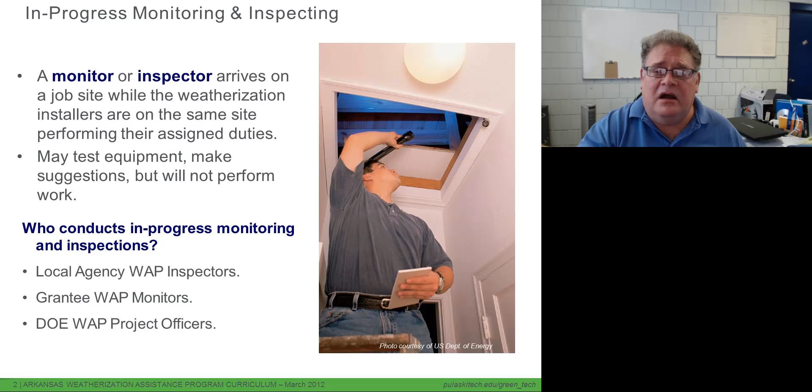But the point is you're going to have a set of rules, some procedures to follow, some regulations, some funding limitations, and we're using the WAP as an example. So within that example, our local agencies would have their own QCIs that are going to go out and do this, and then the people they get their money from is the state or the tribal organization. They would then in turn get their money from the feds, in other words, the Department of Energy. So the DOE project officers, the state or tribal monitors, and then your QCI, your local agency, are all three very good candidates for going out and doing this kind of inspection.

So the reasons that we do this are, this is a good chance to discuss the scope of work. If we have something that is on the scope of work that's not really well understood, or that's not necessary to do in a particular way, we can do it in a much less expensive way and still meet the requirements of the audit, then this is a good opportunity to discuss that and to finalize what the work scope really should be as opposed to what it is now.

The other thing is it allows us to test and make sure that the equipment that the crews are using is effective and working properly. It also allows us to ensure that the procedures and the policies of the program are being followed.

If we have a policy that there's no cussing, no foul language, that we're going to observe a very sexually neutral work site where we're gender inspecific and this kind of thing, then those types of things should happen out in the field. It shouldn't just be that all of that quits when the crew gets in the truck and the horseplay starts and the non-professionalism starts.

A certain amount of camaraderie is necessary for a crew to function properly, but this doesn't necessarily need to be part of it. The respect that they have for each other should also lend itself back to the agency, and part of that is to enforce the rules and policies that the agency has for their conduct.

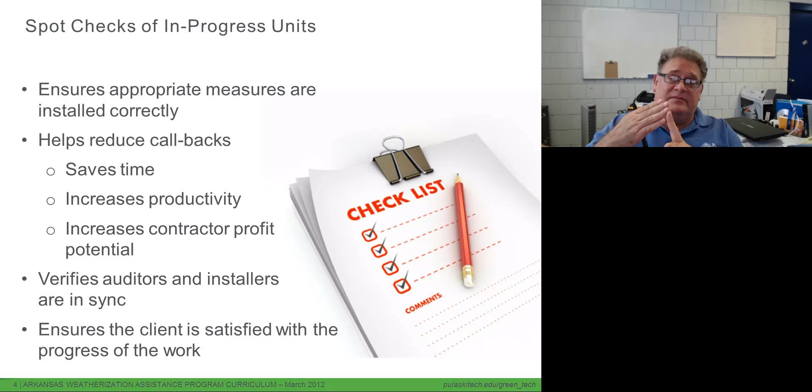Now we can get the auditors and the installers on the same page and say, hey guys, this is what's really going on. When we say do this much and no more, we really mean this much and no more. This part of it's not necessary, it wasn't authorized, and we're spending money here that we don't have to, and it's slowing us down, so let's not do that anymore.

The other thing is it allows the quality control inspector to interview the client, find out how comfortable they are with the work so far and with the crews. Sometimes we get on somebody's property and we know that we're making them uncomfortable just by being there. But we may be making them uncomfortable additionally and unnecessarily with the way that we're acting or not acting.

We may be being way too formal with them and putting them ill at ease. We may be not being formal enough. They're not hearing enough yes sir, yes ma'am from us, and they feel like we're disrespecting them.

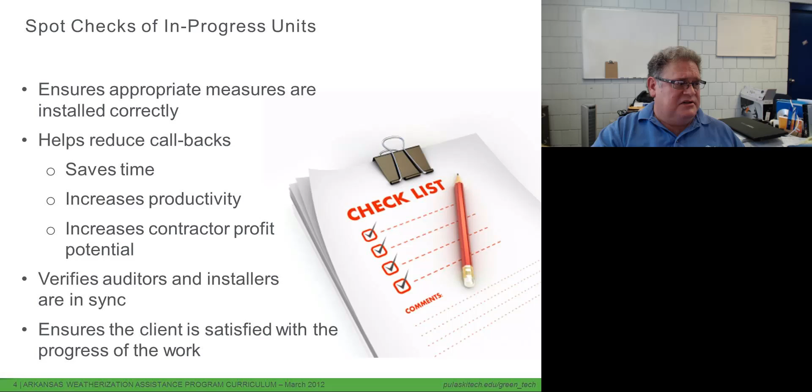So sometimes having the QCI talk to the client, find out what the ins and outs of what makes them happy or what the crew is doing that they find pleasing, and bolstering that up helps to ensure client satisfaction and their happiness with the work. A lot of times just being happy with the crew means that they're going to be happy with the work.

Again, let's talk about finalizing the work scope. This is a good opportunity to talk about and make sure that the scope of work really identifies what we need to do.

Sometimes we'll have a difficult situation. The auditor may have called for a lot of material and a lot of repairs in order to dense pack a wall that can't be done from the outside because of the siding material or access, so it has to be done from the inside. However, once the crew chief looked at it, he realized we've got a 12 and 12 or a 12 and 16 pitch roof. We've got plenty of room at the eaves to either drill the top plates and dense pack these walls, or guess what, they're balloon framed. We don't even need to drill. We can dense pack these no problem.

Which means that we don't have to go in and mess up the interior of a home. We can save a lot of money by doing all this work from the attic as opposed to going inside.

The other part of all this is that it helps to identify opportunities that the auditor may have missed. Auditors go in, and while they have their routine and their checklist, they're trying to catch everything in one look, just about. They've got 2 to 4 hours to take a look at a house and come up with the best plan that they can. Sometimes things change from the time that they audit the house to the time we get out there to weatherize it. There may be an exterior door that the auditor completely missed because it was covered by shrubbery or inaccessible, or had rubble piled up against it, or furniture from the inside. They just didn't see it as an exterior door. It didn't register with them, so that may be an opportunity to do something.

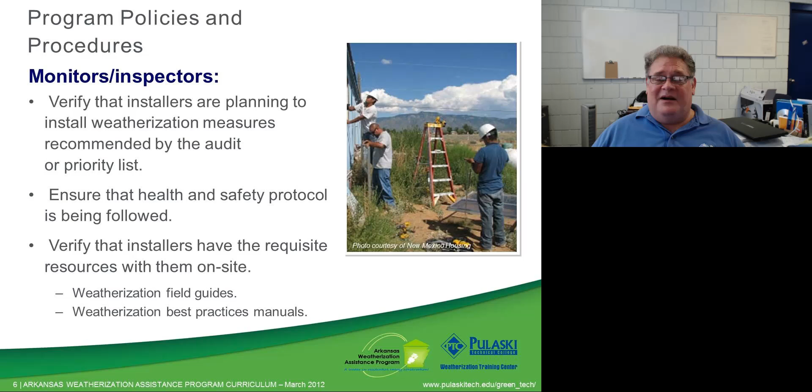And then also verify that the installers have the right stuff with them. Do they have the right door? Do they have enough material? Did they bring enough sheetrock? Do they have enough caulk? Do they have field guides? Do they have a list of best practices? Do they even know what the priority list is? Did they bring the work order with them? You'd be surprised at what kind of silliness happens in the heat of the morning trying to get out the door, get a cup of coffee, get the truck loaded, and get to a job. Sometimes you just have a bad morning and wind up on the job not nearly as prepared as you'd like to be, and sometimes you need to get reminded of it so that you quit having those bad days.

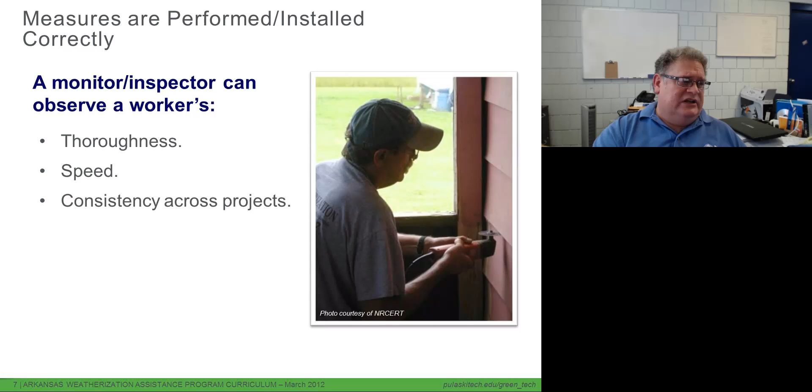The other thing is to take a look at whether or not those measures are performed and installed correctly. Not only are you doing what's on the audit, but are you doing it properly? And here is a really grand chance for a monitor or an inspector to check and see how thorough a contractor or a crew is, how quickly they can move through the work realistically - not just set a speed record, but realistically, day in and day out, how quickly they can move through the work, and then also how consistent they are across all of the projects they may be working on. They may be really good at something and really bad at something else.

And then I guess this is probably my favorite part. Nobody knows how to do anything until they're trained or they teach themselves. And a lot of times we assume that what is common sense is known by everybody.

Let's face it, common sense is only common when everybody's in on the joke. If you don't understand, you just don't understand, and there's nothing wrong with not understanding. It just means nobody's explained it to you.

And that means you haven't been taught what the meaning of it is. So if we don't train our crews and refresh that training, then we cannot expect them to perform.

So this is a good chance for a quality control inspector or a monitor, especially a monitor, to identify what kinds of quality control issues are taking place in the field, what kind of problems we're having. If they're seeing an agency-wide or territory-wide inconsistency, they can go back and say, okay, we need training on how to do this or that.

This might apply to all the installers, or maybe it's an auditor issue, or even a QCI issue. The other thing they can do is recommend that the agency adopt this as a best practice, the currently agreed-upon best way to do things.

Maybe they're just a little reluctant to do it because they haven't seen it done. Maybe all they need to do is go visit another agency for half a day and watch them do it, and everybody who was reluctant goes, oh yeah, that's nothing, we can do that, we need to be doing that.

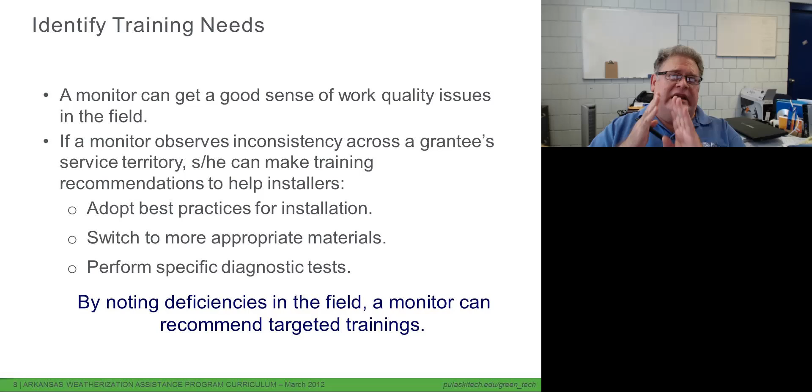By noticing what's going on, both right and wrong, a good monitor can recommend very targeted trainings to correct just the issues they're seeing, just the issues.

Equipment testing: monitors and inspectors may also test equipment while on site, although it's not required. They may look at equipment like the insulation blowing machine. Are the pressures set properly for dense packing? Do we have leaks in the hoses? Are the hoses ready to explode from old age and duct tape?

What about blockage points? Are we restricting and jumping down in size too fast? It's considered much better practice to make gradual reductions in hose size rather than dramatic reductions, because that helps prevent blockage.

And then combustion safety equipment: are the combustion analyzers calibrated properly? Do they have fresh sensors, or are the sensors two years overdue for replacement?

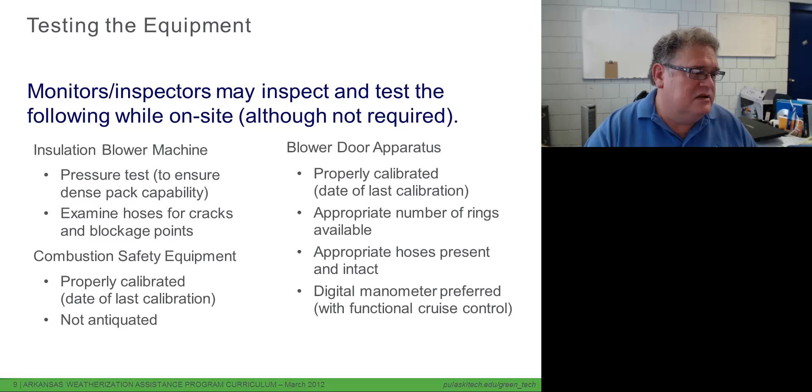Blower door equipment, is it in good shape? Is the fan all bent up and cracked? Do they have the number of rings needed to test the house properly? Do they have hoses, and are they in good shape, or 40-year-old hoses that should have been thrown away 30 years ago? Do they have a good digital manometer? So those are the types of things they can look at.

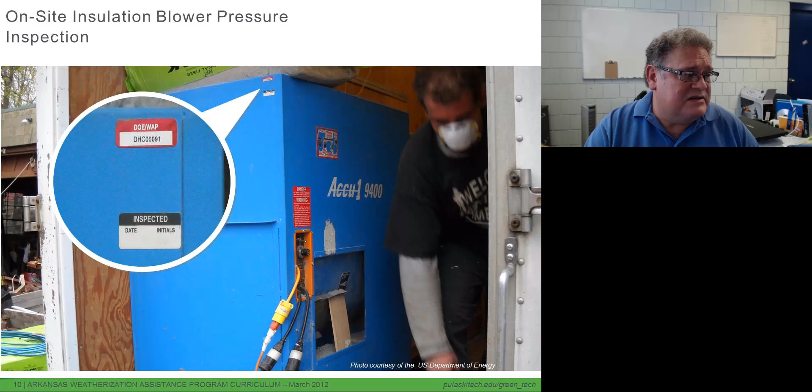Health and safety: if we're doing lead safe work, do we have a certified renovator on site? Are the installers trained, and do they carry the proper safety equipment to do the job?

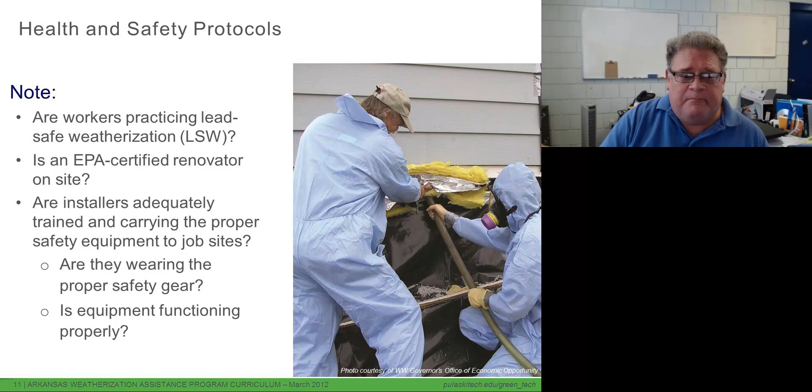The other thing is, is the equipment working right? Again, we come right back to: is the equipment working right? So as far as what should be on the truck to protect both the workers and the site, let's talk about that.

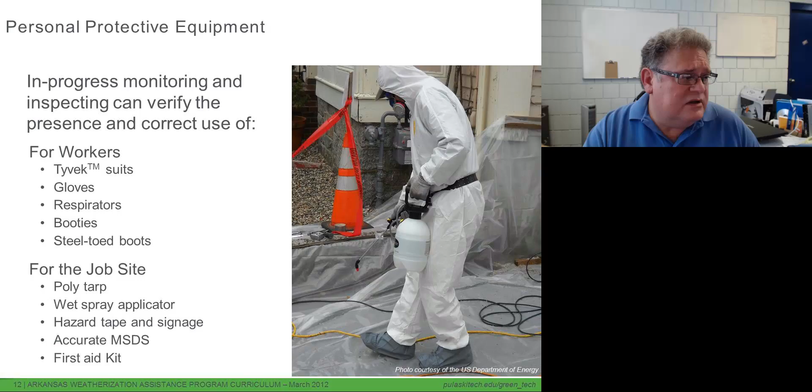We should find things like Tyvek suits, a variety of gloves, respirators, booties. The crew should probably have steel-toed boots. However, for the job site they're probably going to need different things like poly tarps, a wet spray applicator, hazard tape and signage, accurate MSDSs—that's required by federal OSHA regulation—as well as a first aid kit. So these are some of the things we should be looking for to determine whether our crews are doing a good job out in the field.

Because if they get inspected by OSHA, it's the agency or the company that gets written up, not necessarily the worker.

As far as EPA regulations are concerned, monitors can make sure that everybody—the auditors, the other monitors, crew members, and contractors—have attained, if required, EPA certified renovator status. If they're overseeing a job, they need to have that renovator status, but they also have to be assigned to a particular job, and in addition, associated with a qualified firm.

So the lead safe regulations are not simple, and we need to make sure we're complying with all of them, because the cost of noncompliance is very expensive.

The number of in-process inspections—oh boy, that's a good question. How many should you do? You should do enough to ensure you're doing a good job. So how do you do that? Well, you start off with a set number, just an arbitrary number that you think is going to work.

And then you increase the frequency for technical inspections as you see the need. Once you are giving feedback to your crews, you want to continue to do spot checks, just looking for particular items, and hold regular meetings with the field staff.

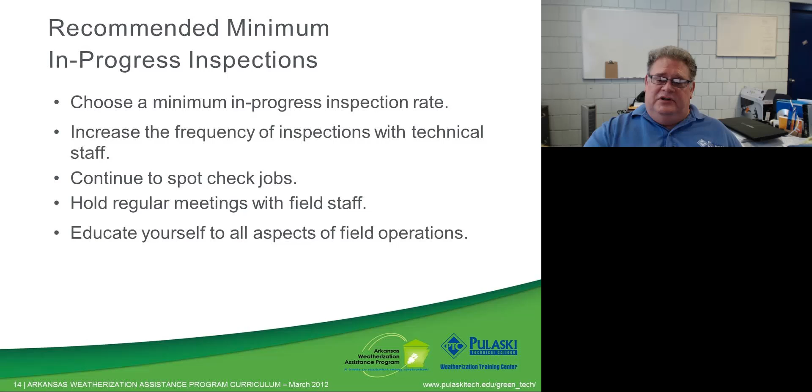You're making them mad. So in summary, start off with a minimum number of in-process inspections, okay? How many, a percentage, so many a week, whatever. And then hold regularly scheduled meetings with the field staff. This gives them the feedback they so desperately need. They need to hear when they're doing well, and they need to hear what they can do better, and they need to hear it in a positive light. Be positive with this.

A monitor and inspector should educate themselves as to the gross process that takes place out in the field, the overall process of doing particular jobs, and then what that job looks like when it's done and done correctly. Otherwise they're not qualified to judge whether it's done correctly or not. That's why not everybody's a QCI. You've got to have a lot of experience, or the ability to get a lot of experience in a short period of time, to be able to do this, because it's a complicated job.

The other part of it is you've got to make sure that the equipment being used is functional and up to date. Make sure that the program policies and procedures you're working under, whatever program that is, are being followed. And that's very important, because that can mean dollars or it can mean injuries. So it's important to enforce those, even though you don't want to be the bad person.